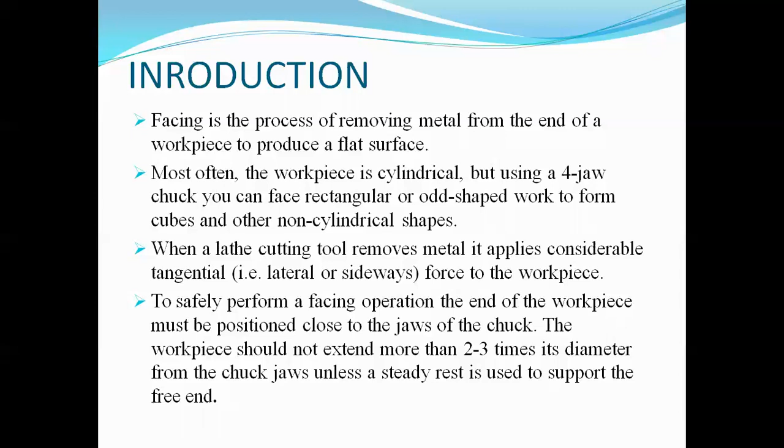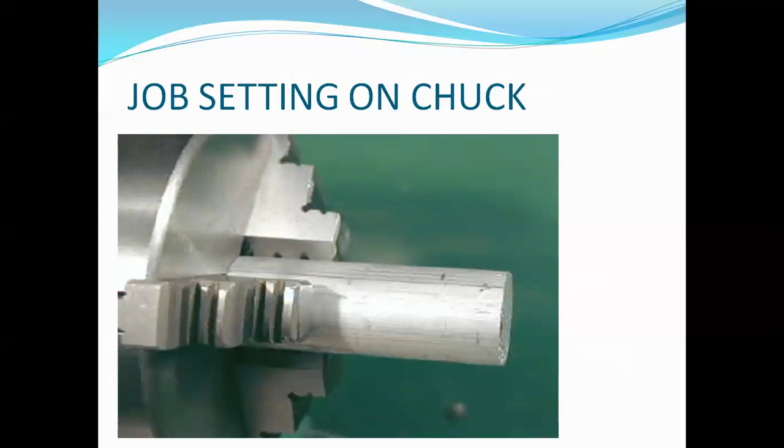This is a cutting tool. You can see the nose radius over here. This is a preliminary condition. You can see how smooth it is, and that cutting tool is fed across this direction, that is perpendicular to the axis of the job, with some inclination of the cutting tool.

That perpendicular motion to the axis of the job is provided by the rotation of the crossfeed wheel, providing the crossfeed, and this crossfeed motion is given very slowly. If any hastiness or very rapid motion is given, then there will be some scratch marks or poor impression on the surface. The slow speed of the motion of the cutting tool is needed.

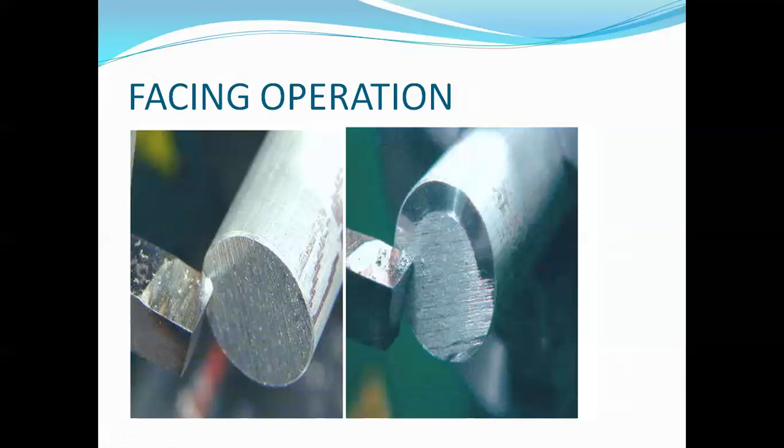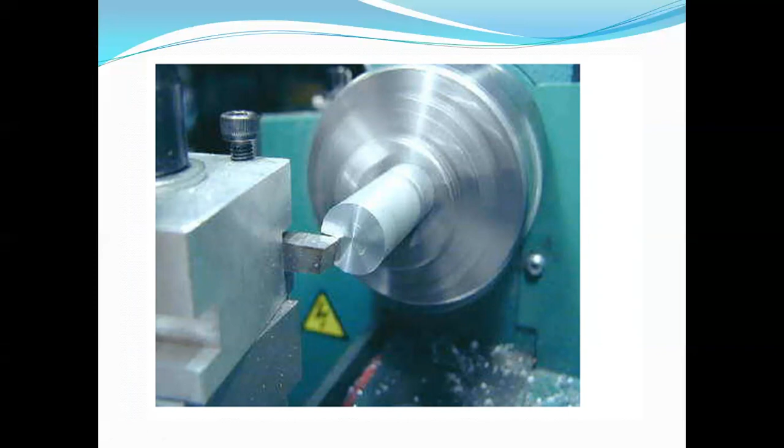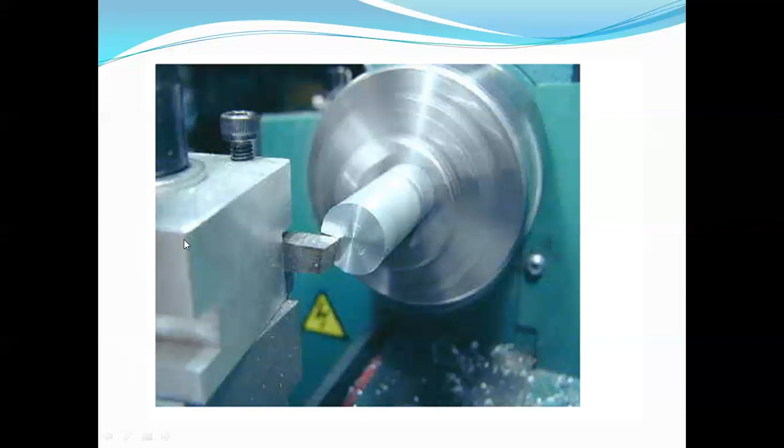And finally, you can see the surface, how smooth it looks. This smoothness will transfer out, and obviously the roundness is achieved by the facing operation, because the cutting tool always has to initiate the journey for the turning operation from here. The initial position should be free from any unwanted bumpy impressions or burrs.

The burrs or bumpy impressions or unwanted impressions over the surface are always removed by the facing operation such that the tool can travel from this position towards the headstock. This is the 0, 0 position. Also the facing purpose is to provide the journey of the tool from the 0, 0 coordinates to the accurate dimension very smoothly.

Now you can see after the facing operation is done, the outer surface or the periphery of the ends over here may have some bumpy impressions or burrs. To remove the unwanted materials, some filing action has to be done over the surface. The job is rotating and some motion of the file should be given, and by the relative motion and contact, the unwanted materials will be removed and the surface will be smooth and fine.

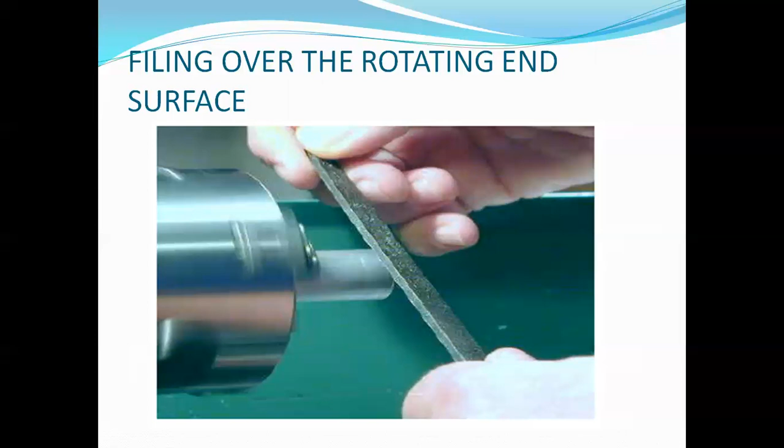Turning process. What is the turning process? The turning process generally comes after the facing operation. Whenever the facing operation is done from this end, the smoothness, roundness and accuracy are achieved. After that, whenever in the turning operation the diameter of the job is to be reduced, the cutting tool should be given motion to make relative contact with the job, and after contact is made, the machine is on and the job rotates.

That is, turning is a process where the job is rigidly held in a chuck, faceplate, driving plate or centers, and a cutting tool is given motion over the revolving job, and upon relative contact, the desired amount of material is removed and the diameter is reduced. This reduction of the diameter by machining is called the turning process.

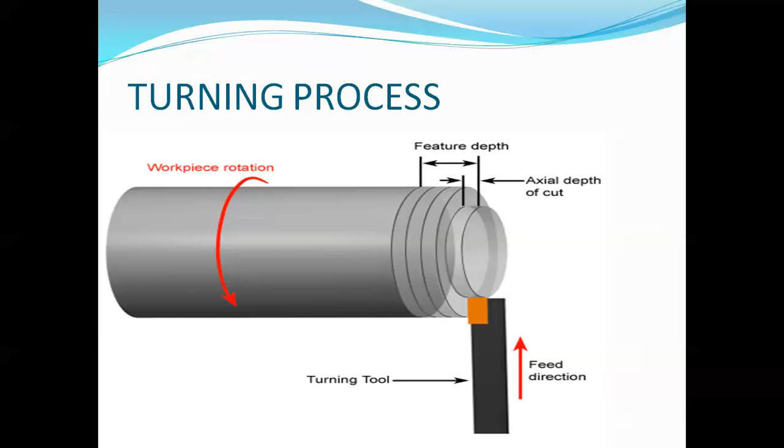Turning operation. You can see this is a larger part and this is a smaller part. This small diameter is reached by the machining process called turning. From here to here it is machined, and from the larger diameter it is reduced to this diameter by providing the longitudinal feed of the tool over the job as well as the cross feed. If the cross feed was not provided, the reduction to this diameter, small d, would not have proceeded.

This is a radial feed, perpendicular to the axis of the job. Radial feed is provided by the cross feed, and that is why we get the depth of cut. And this is the longitudinal feed, parallel to the axis of the job. That is also called the feed force, or thrust force.

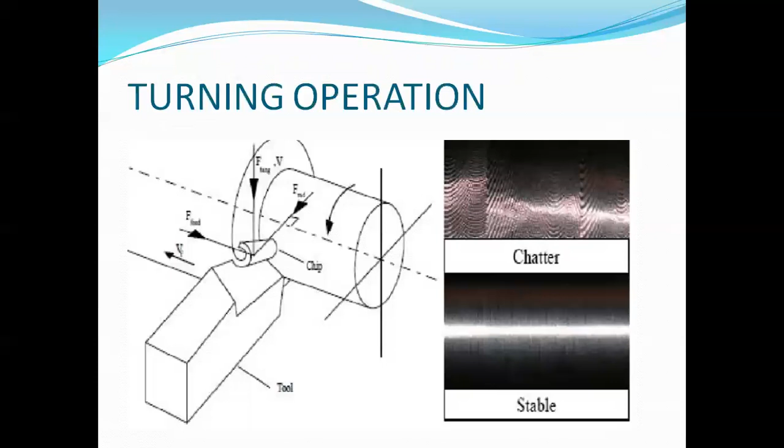Types of taper turning. What is taper? Taper is nothing but the difference between the dimensions of the two opposite ends of an object. For a cylindrical object, the taper is defined as the dimensional difference, that is the difference of the diameter of the two opposite ends, with respect to the specified length. Obviously, the taper is done over a length.

And for a rectangular object, the taper can be defined as the difference between the two opposite ends, that is either the width of the two ends or the thickness of the two ends. And it is stated over a length. Without the specified length, the taper cannot be adjusted.

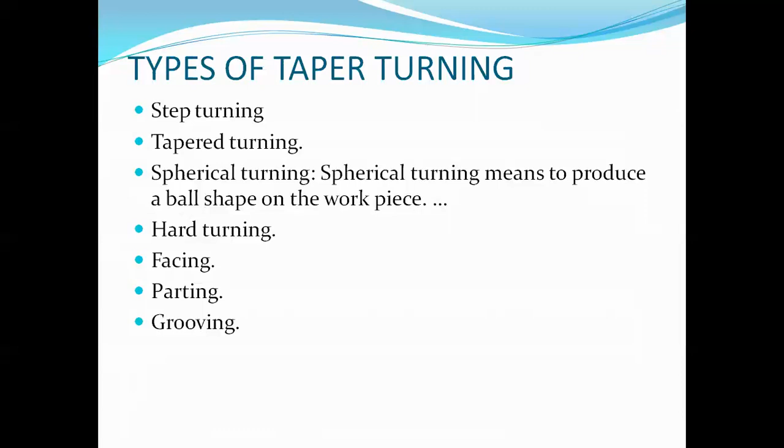Types of turning: step turning, taper turning, spherical turning, hard turning, facing, parting, grooving. But we will concentrate mainly upon step turning and taper turning. Hard turning occurs whenever the hardness of the job is more than Rockwell hardness 45. Then hard turning is done.

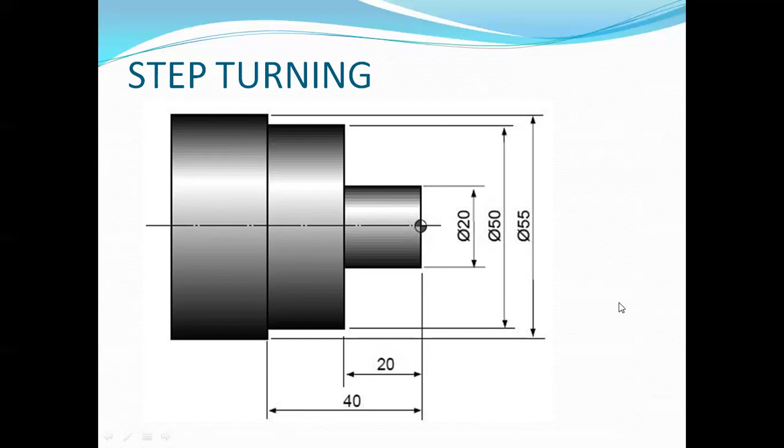Taper turning. Whenever the diameter of a piece changes uniformly from one end to another, the piece is said to be tapered. As already said, taper turning as a machining operation is a gradual reduction in the diameter from one part of a cylindrical workpiece to another part. Tapers can be either external or internal.

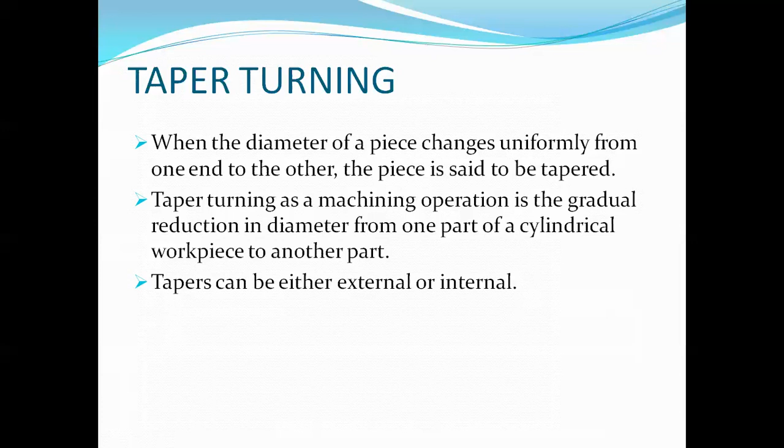Types of taper turning process. These are the 4 or 5 types. It can be done by the broad nose or form tool, by the tailstock set-over method, by swiveling the compound rest, or by a taper turning attachment. But among these, swiveling the compound rest and the taper turning attachment are the most vital. But according to the syllabus, I will illuminate the topic of swiveling the compound rest.